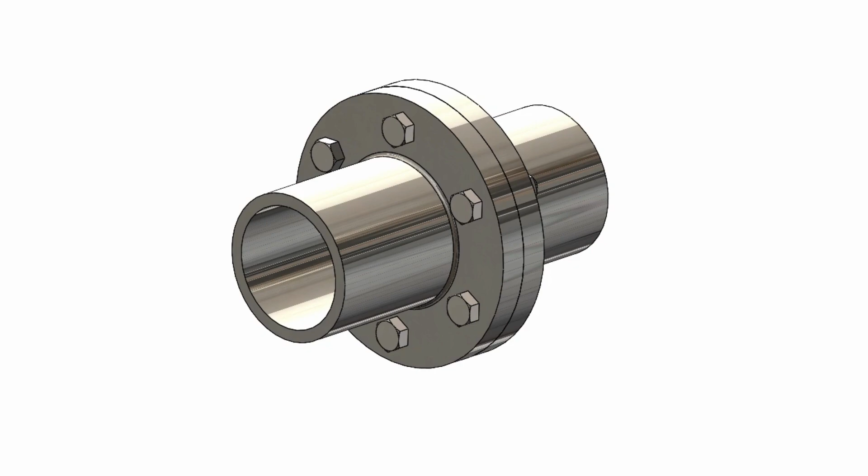This is flange coupling. In this video, we are going to learn how to create the flange, how to assemble it, and how to fix it with a nut and bolt. Also, we are going to learn how to create the animation wizard of the explode and collapse of the flange coupling. Okay, let's start.

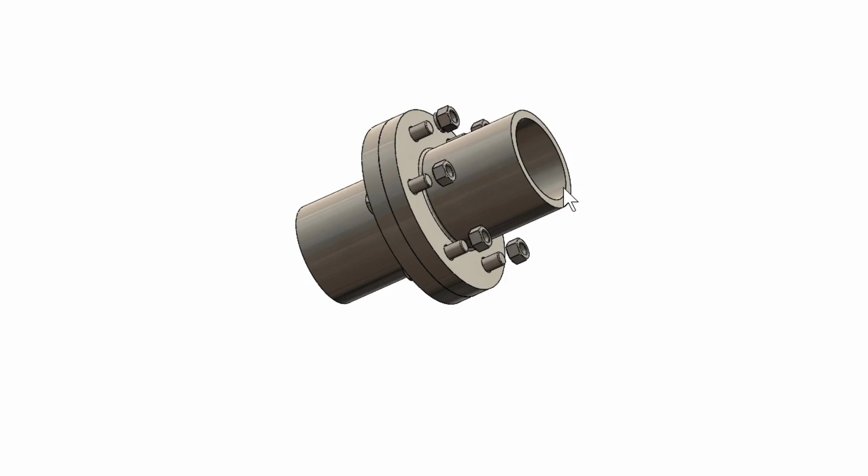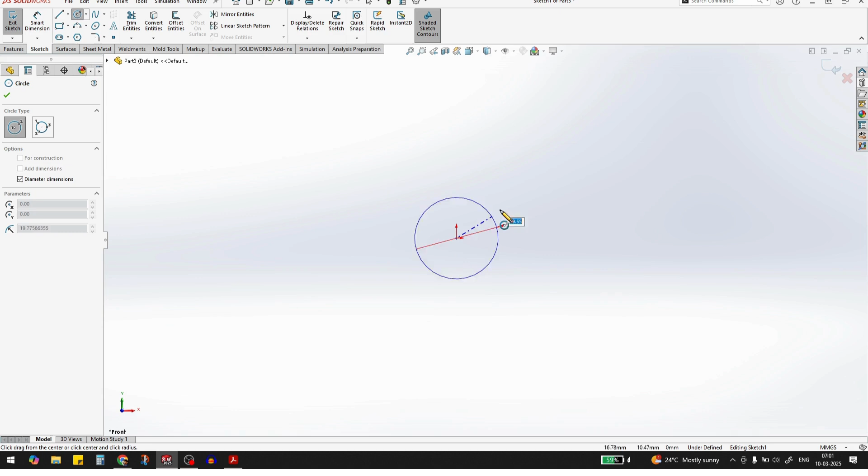Initially, go to new, select part, say OK. Then go to the front plane and sketch. Here we have to draw one circle from the center point. The circle diameter will be 220 mm. Okay, exit from the sketch, go to the extrude boss base.

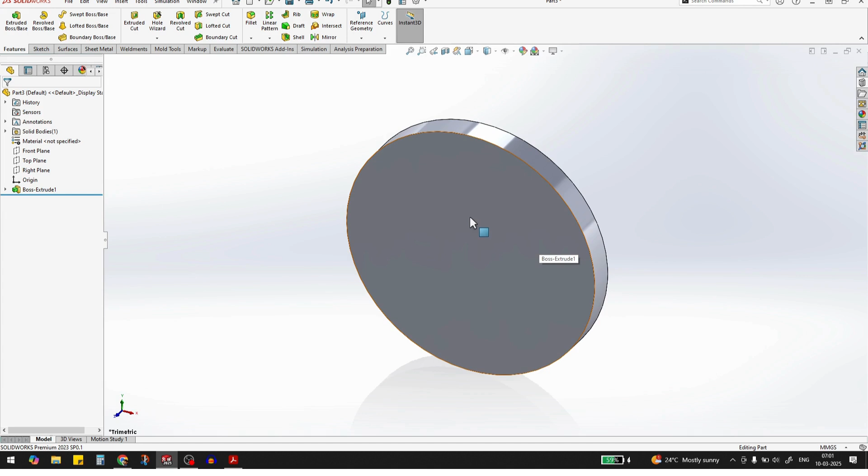This thickness will be 22 mm. Then enter. Then again we have to select this face and sketch. Take a circle from the center point. This circle dia will be 120 mm. Then exit from the sketch, go to the extrude boss base.

This length will be 120. Enter. Say OK.

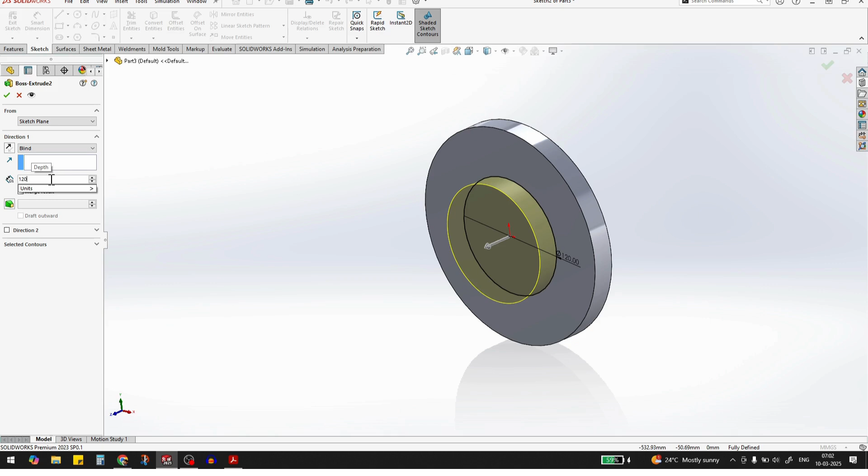Then select this face, make normal. Again take a circle. Okay, first take a sketch, then take a circle. This circle dia will be 100 mm. Enter.

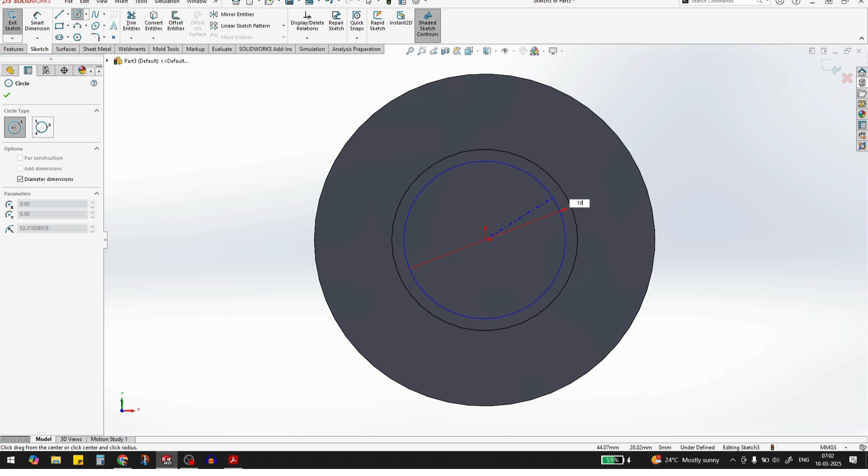Exit from the sketch. Now go to the extrude cut. Then through all, fine, say OK.

Okay, then this is a flange and we have to give the fillet over here. The radius will be 4 mm. Say OK.

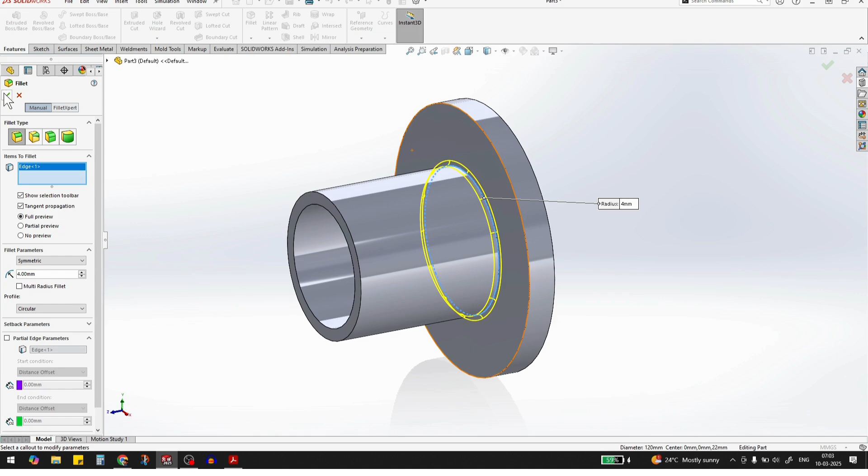Then next we have to create the hole over here. For that, in the features we have to select the hole wizard. Then in the hole type we have to select this normal hole. Then here select the screw clearance. Then select the M16 and just here select the normal and here through all.

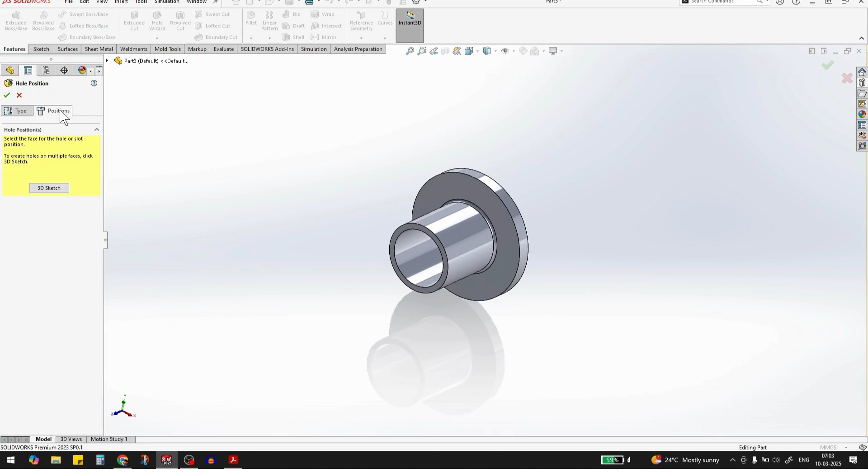Okay, after selecting all this, then go to the position. Here select this face, click over here, then take a smart dimension from this point to the circle center. This dimension will be 85 mm.

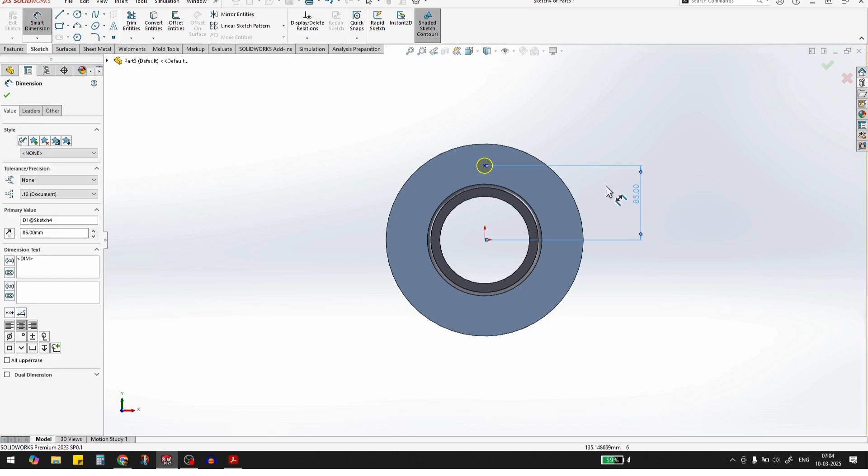Also select this point and from the origin it should be vertical. Fine. Now exit from the sketch.

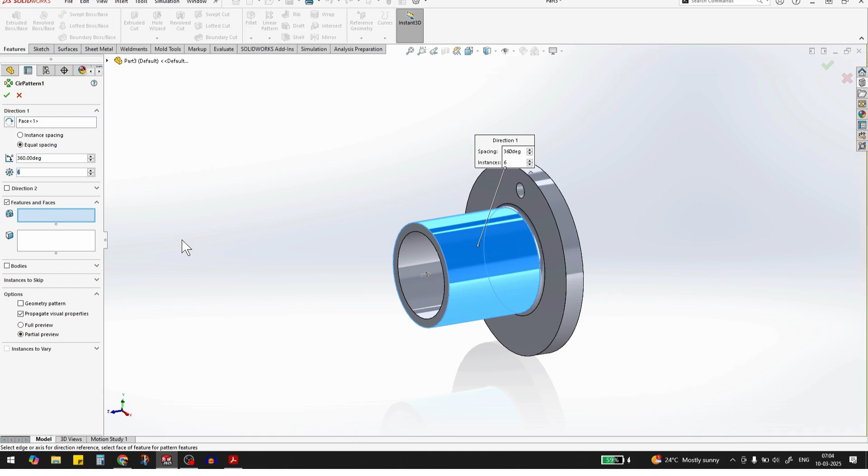Now go to the circular pattern. Here select this surface. Then feature 6 instances. Fine. Here feature to be pattern, select this one. 6 quantity. Fine. Say OK.

Fine, our flange is done. Now what we have to do is just save this one. Flange, save.

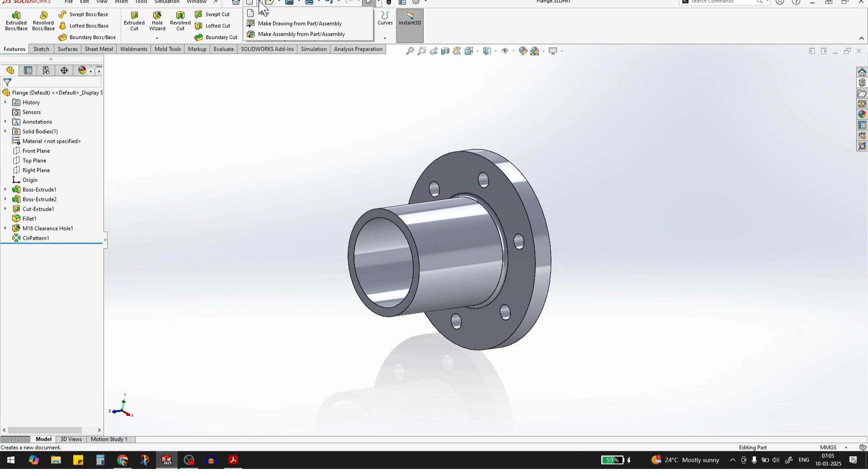Now here we have to go to new, make an assembly from the part or assembly. Then flange is here, just click over here. It's now fixed, so right click on this and make it float. So now it's floating. Fine.

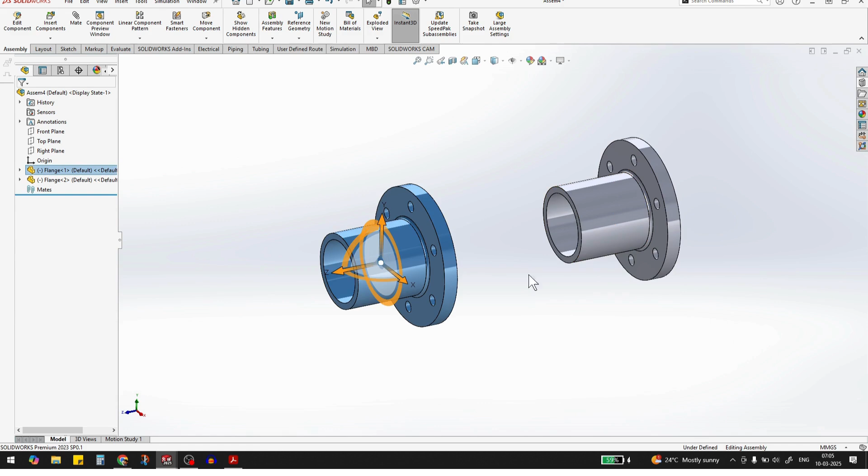Now we have to take another flange from here. So what we have to do is press control, then select the flange, just drag and drop here. Fine. Now if we want to rotate the complete assembly, we have to press the middle button of the mouse, so the complete assembly will rotate.

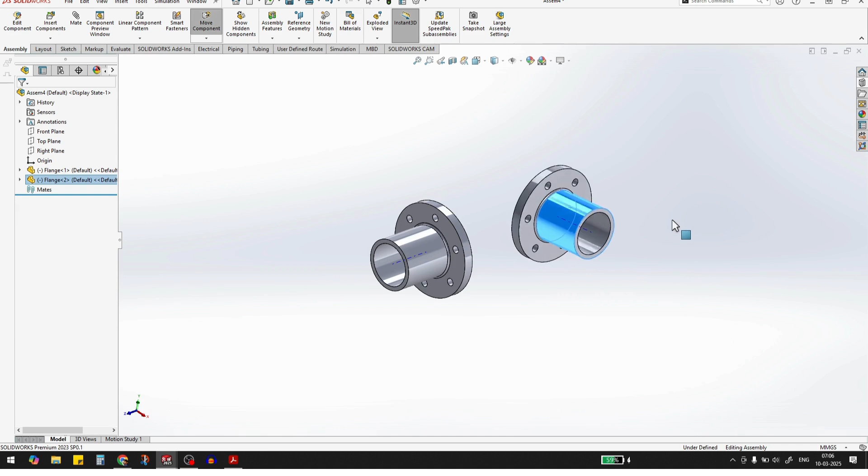If you want to rotate only a separate single part, we have to press the right button of the mouse and then rotate. So fine, so on the mouse right button we have to rotate this one.

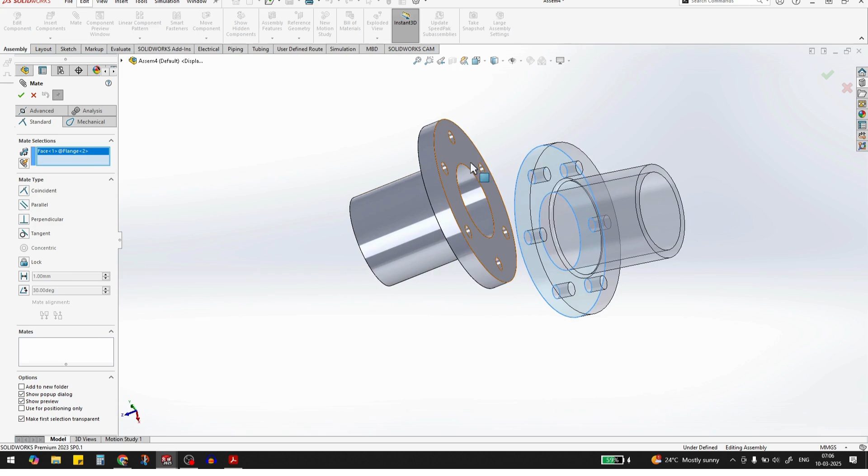Then we have to select this face. Before that we have to go to the assembly, then select mate. Here we have to select this face and then this face. Now these two faces are coincident.

Now say OK. Then again we have to select this surface and this surface. It automatically took the concentric. Say OK. Now first of all I'll make it fixed now. Fine.

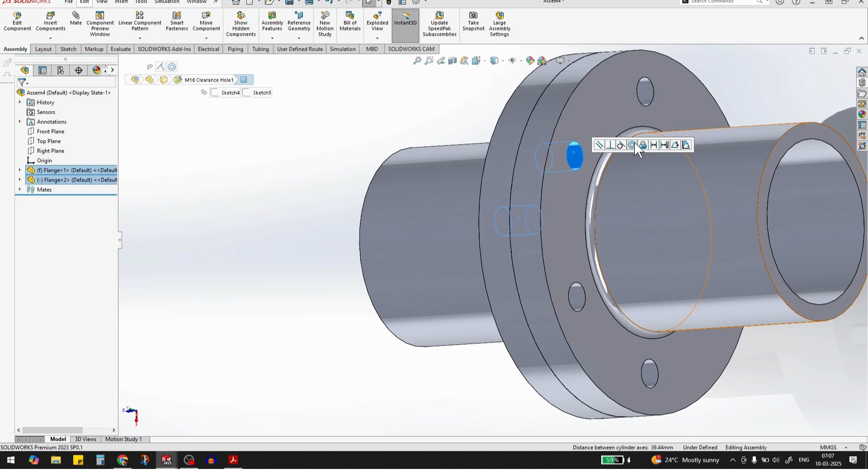Next I have to make these two faces concentric. So click both and select concentric. Fine. Now the flange, two flanges are fixed with each other.

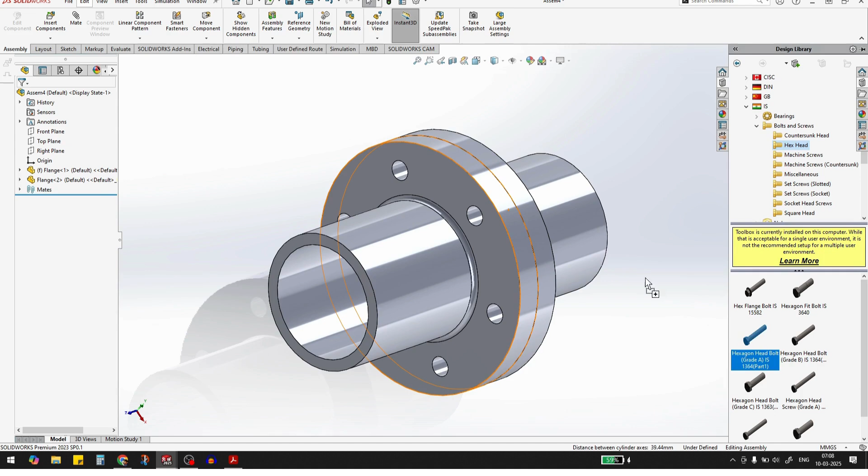Next I have to go to the design library. Here bolts are there, so I'll select the hex head bolt. Fine, I'll take the hexagon head bolt here. I'm just clicking and dropping, so I will take it on that hole, and I'm just leaving it.

It automatically took the M16 because we are giving the clearance for M16, and its length is showing 65, thread length is 38. Fine, then say OK.

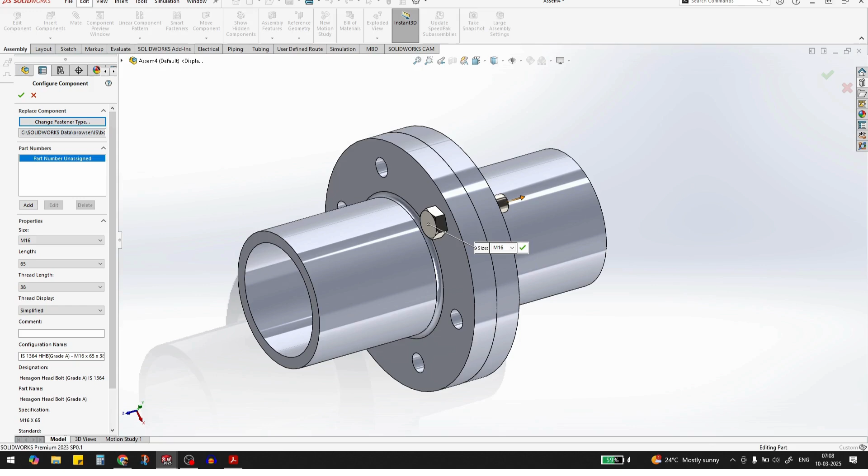Automatically it's coming for the second one, so I'm just taking it on the hole. Just focus here: if I'm taking it on the cylindrical surface, it's showing the concentric symbol. If I'm taking it on this edge, it's showing concentric plus coincident. So on this edge we have to keep it, then click.

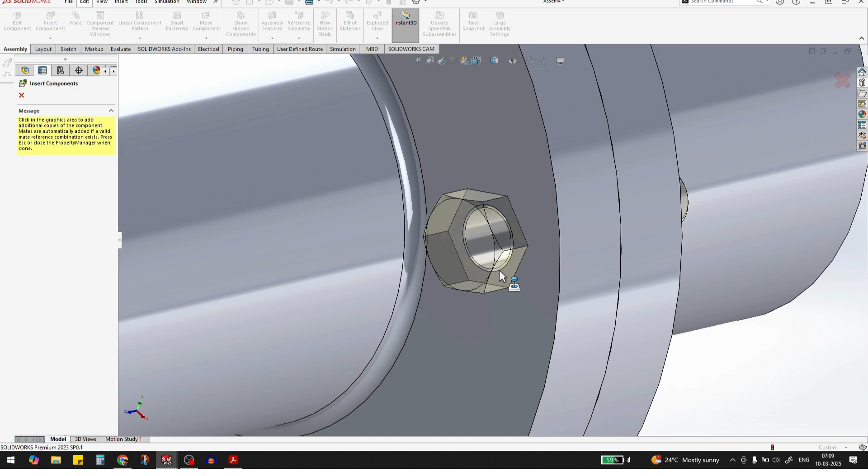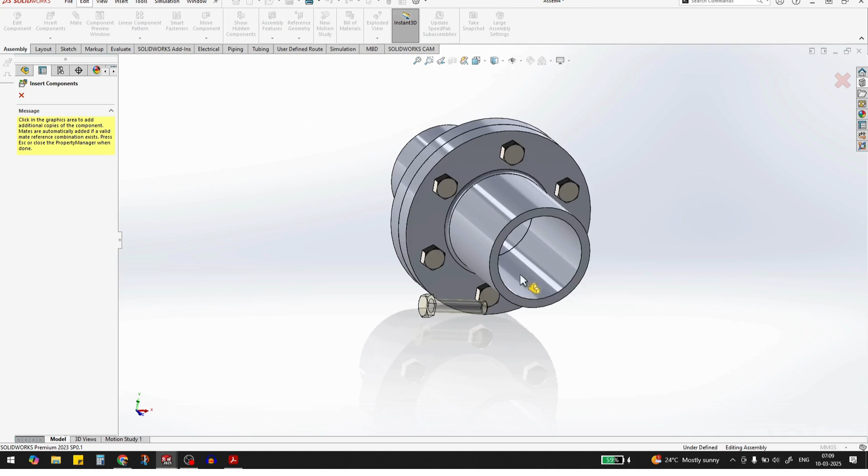Next bolt is coming on the edge. Fine, on this edge. Here also, on this edge. Fine, on the edge.

Bolt size has become big now, so what you can do is just refresh it. Fine.

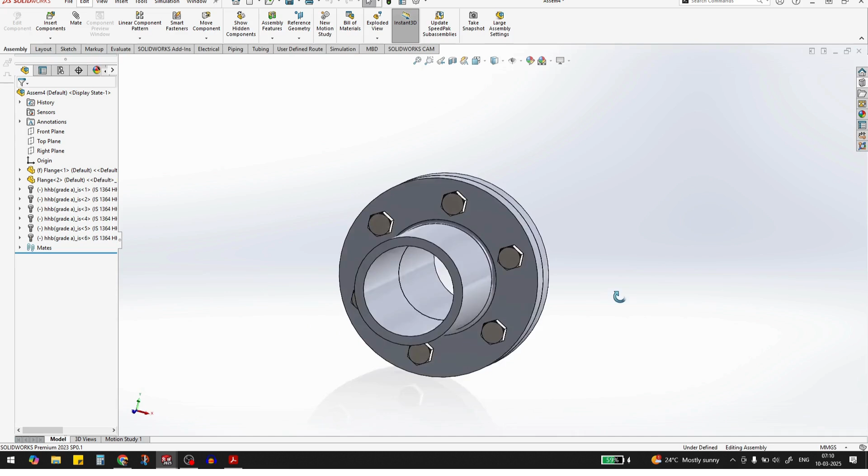Next I have to insert the nut over here. Go to the design library, nut here, hex nut here, I will take this one. So what you have to do is just click and drag and place it over.

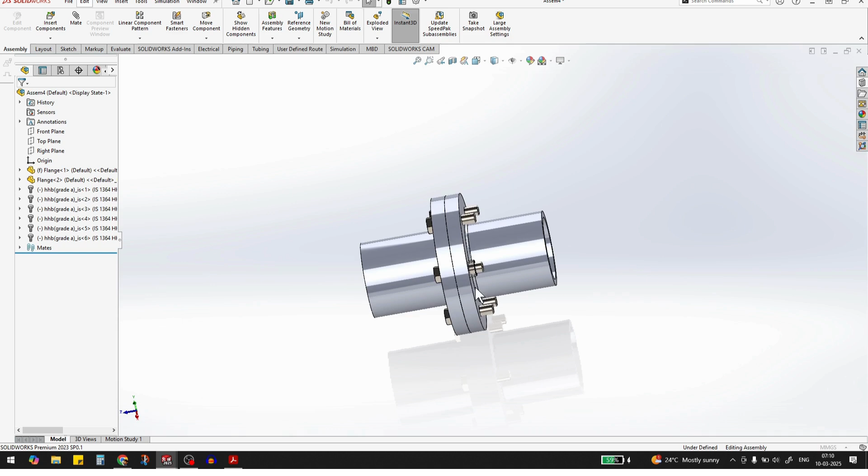If it is not perfectly fitting, just for now it's an M16 nut, then say OK. For the second one, we just check that symbol, concentric plus coincident, then say OK. Here also the same.

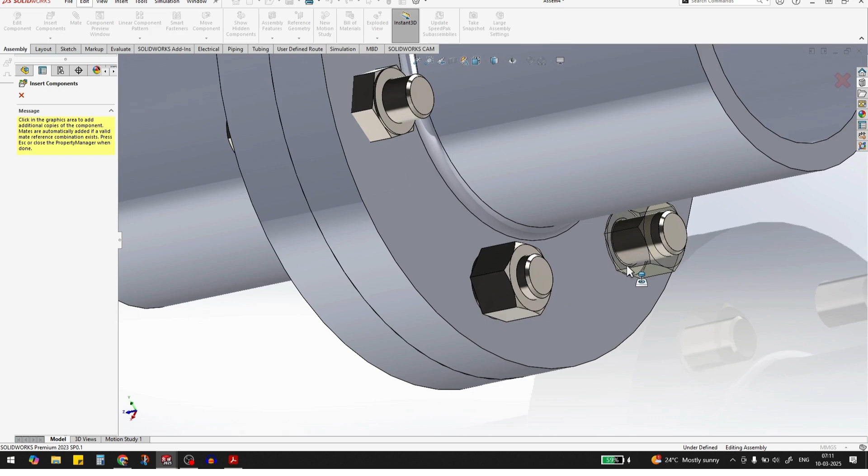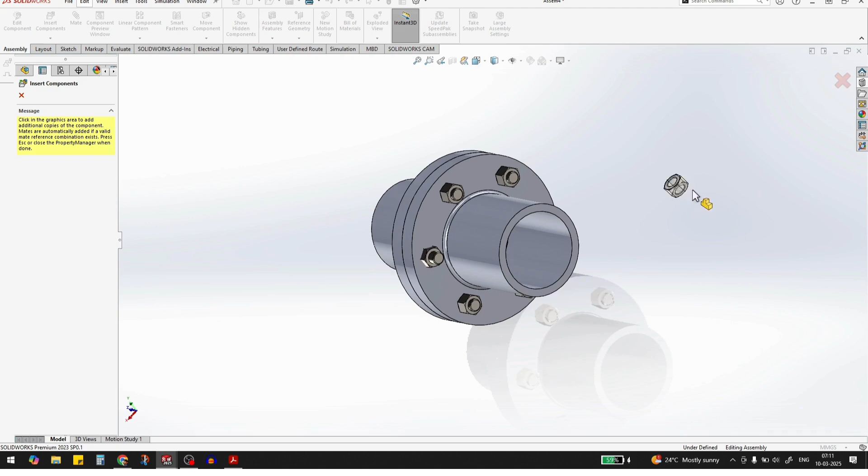You can follow this method also. If you do the first one properly, you can make a circular pattern also. Sometimes there is no circular pattern we have to follow, so we have to select and keep selecting all points, so that this process will work fine.

Exit from the sketch. Here it's perfectly fitting, but here it's still floating, so what you have to do is select this surface and then this surface, coincident. Fine.

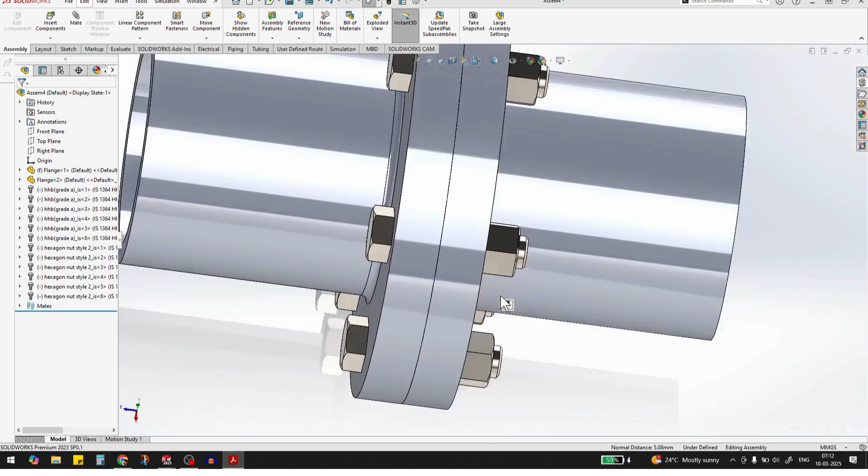Perfect, so assembly is done. Now we will do the animation of the collapse. What we have to do is first go to the assembly, then explode view. We have to create the explode view.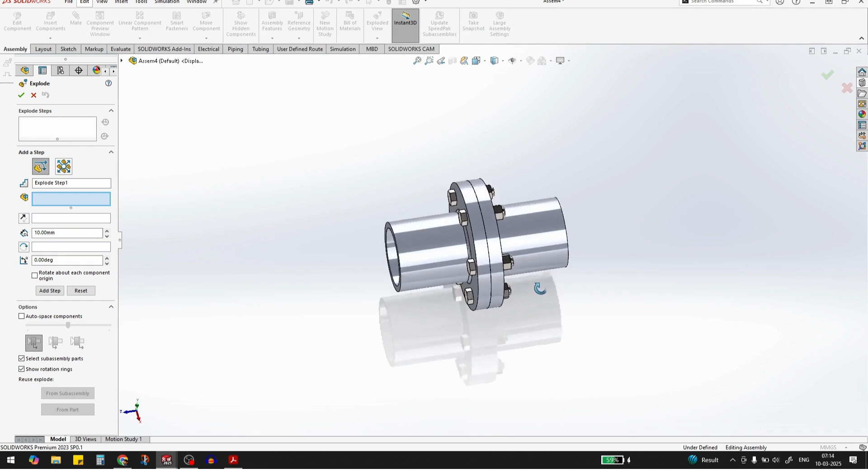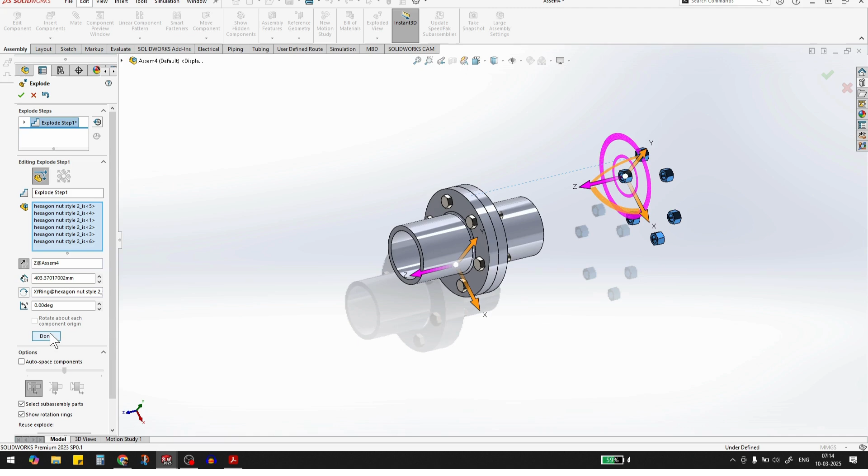We have to select this nut first. All the nuts I am selecting. I am exploding to some distance. Fine, then I have to say done here.

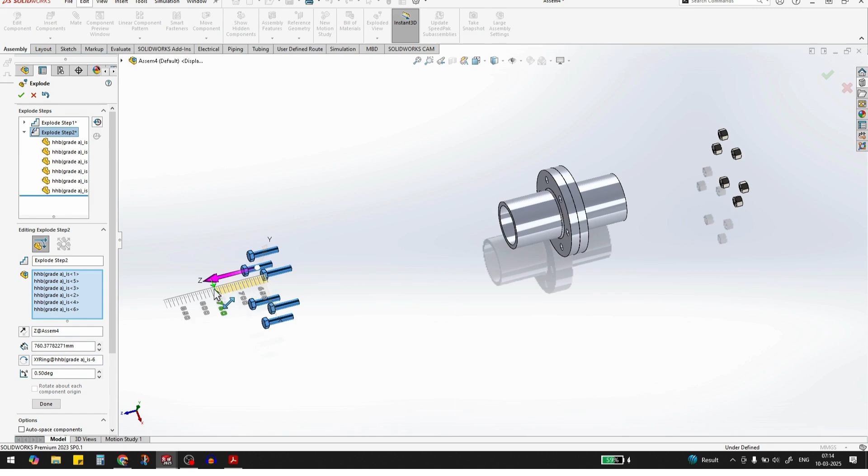Then I have to select all this bolt. All bolts are selected. Now I have to drag for this distance, then say done.

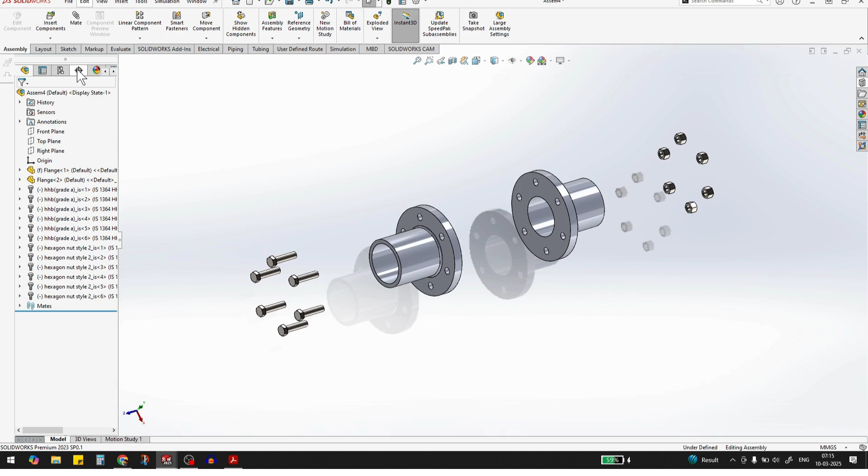Now I am selecting this flange. Fine. Now OK. Fine, here we can also check. This is the explode view, animate collapse.

Also we can go to motion study, then animation wizard, select. Before that I'll set frames per second, I'll keep it 50. Then animation wizard, here I'll select collapse.

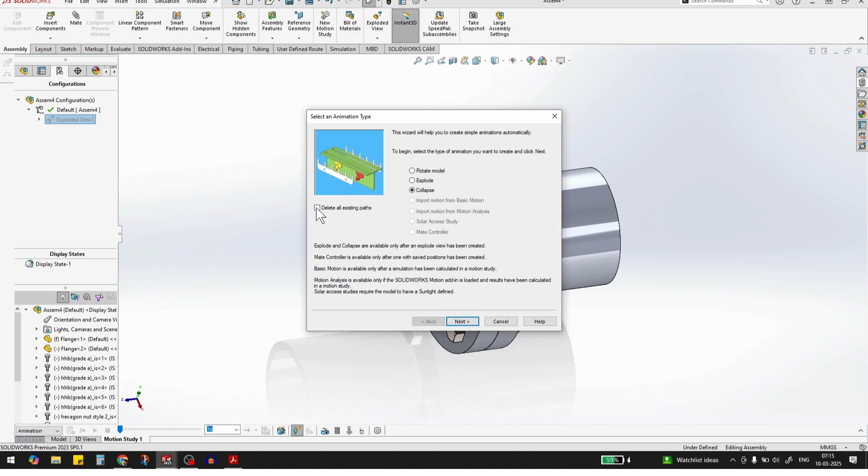Also if you already done something and want to delete the history, you just select this also, then go to the next. Here I'm taking it at 50, finish.

Here I'm calculating it. Fine, perfect. Now I'm playing this one.

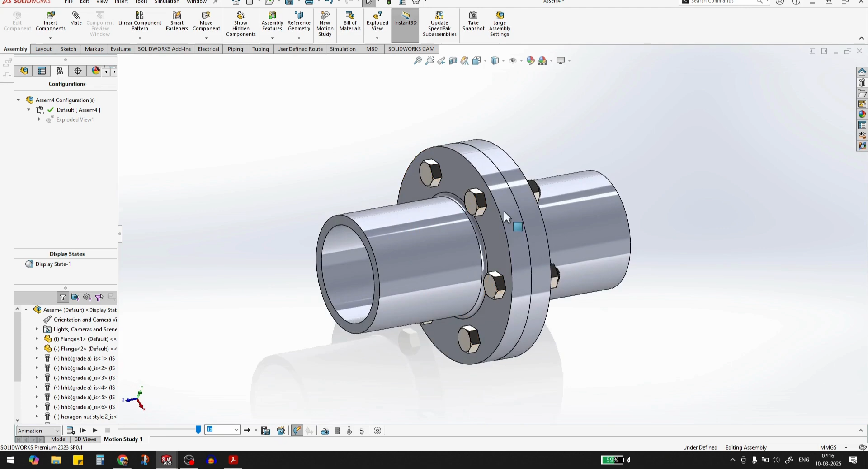Perfect. Okay, this is how we created the flange and fixed it with a nut and bolt assembly, and also we done the motion. We also did the animation wizard, and the animation wizard in the motion study.